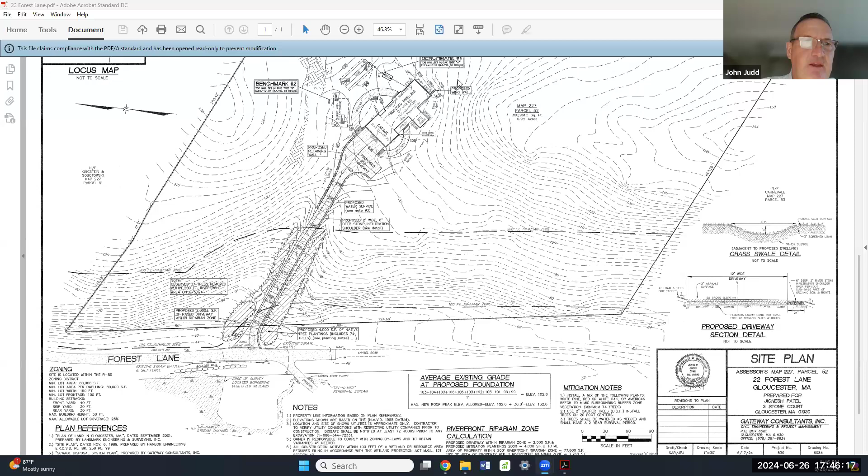I believe Jake Patel is on the line. If you don't recognize him, Chuck, he may want to speak to it. Thank you.

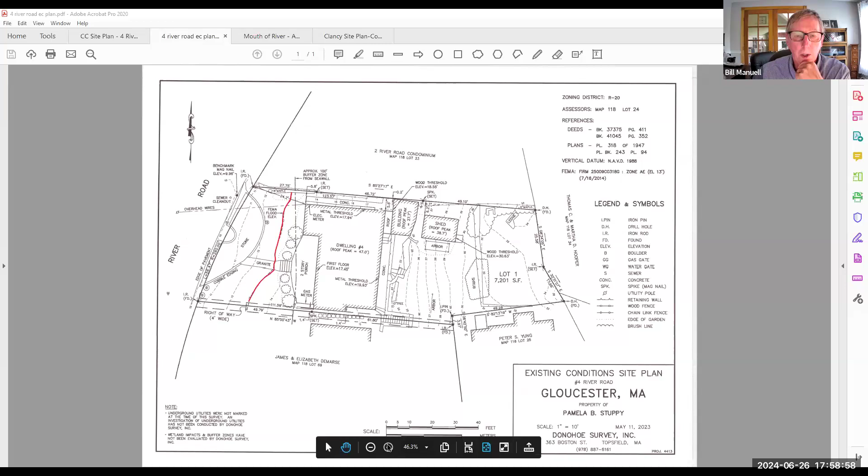I'll start out with this existing conditions plan, it's a little more clear to look at first. This is a piece of property at the very head of a cove adjacent to River Road. It's on the opposite side of the street from the coastal resource areas. There's a wharf wall and mud flats on the opposite side of the street, over here. The FEMA flood map says there's an AE zone extending to elevation 13, which has been survey located, and elevation 13 intersects the property right through here.

Now, we all know that under policy 92-1, if there's land steeper than a 10-to-1 slope below the 100-year flood elevation, that's considered a coastal bank. So this area on the property, already developed with a stone driveway, walkway, landscaping, and grass, is actually considered a coastal bank. And the red line would be the limit of land subject to coastal storm flowage. We have the existing home here, and there's a sort of shed building extension here, a shed out back, and some lawn and landscaping.

And you can see the topography here, it slopes up rather steeply behind the house. There's also walkways, a porch on the west side, and more paved walkways here. This is a pretty neat project.

Because, despite a tear down and rebuild, and actually an expansion of the footprint, we've maximized the footprint over the existing features, and we've removed a lot of impervious areas on the property. So at the end of the day, there's only a net increase of 129 square feet of impervious area, and we've mitigated for that by over a factor of 8.

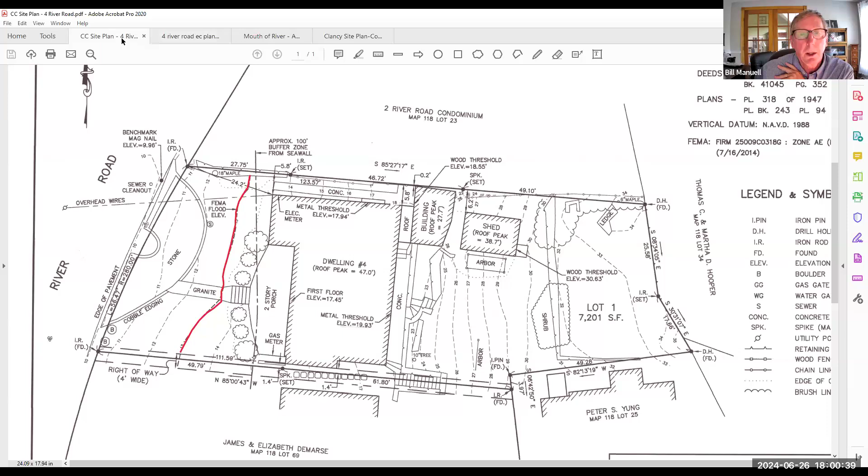So let me jump into the plan right now. The first thing I'd like to show you is this little detail at the bottom of the plan here. This is 4 River Road here. As I said, it's at the very upper reaches of a cove adjacent to the Annisquam River.

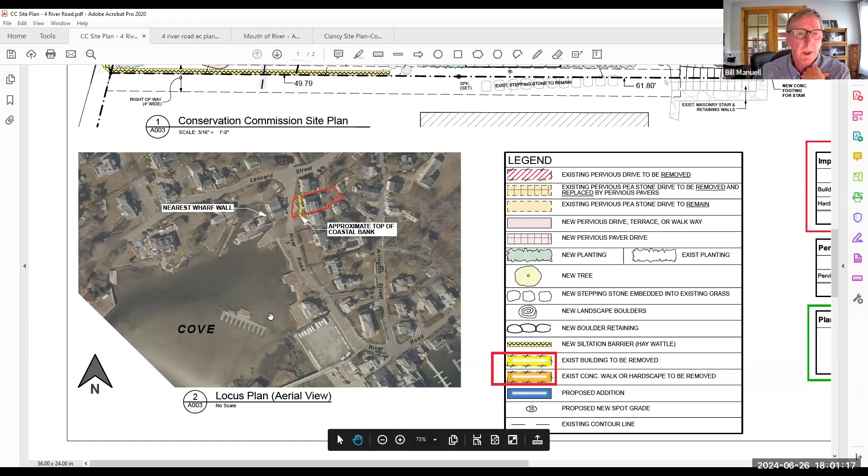There is about over 600 feet of separation between the front of the house and the actual channel of the river. We have Dr. Peter Rosen, who's going to speak later, and he's going to explain the geology of the cove and the characterization of this area. But I will get into the proposed work and let you know what's going on.

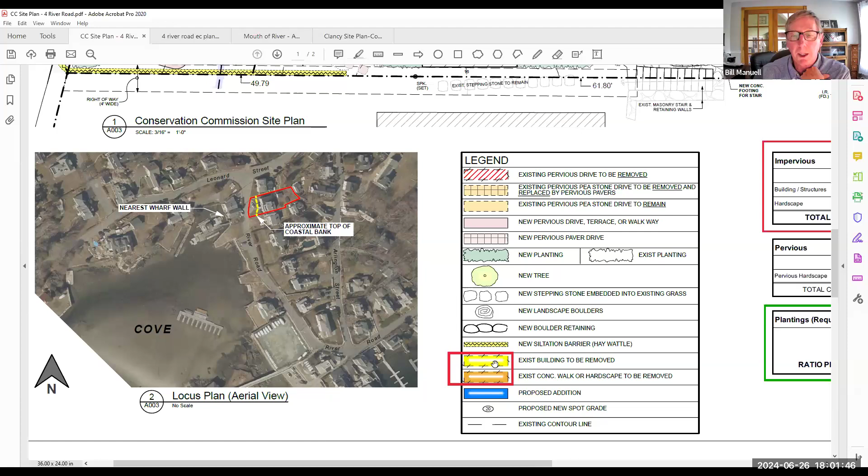So we tried to color code the plan. Poor & Company is the architect, and they do very well at trying to make things as clear as possible. The things we want you to key in on are blue color, which is proposed additions to the structure. Brown and yellow are existing building or existing walkways or impervious surfaces that will be removed. So the intent is to demolish the existing structure here, take it right down to the ground, and rebuild it in the same footprint.

Then add on this blue area back here. This will actually be, for lack of a better term, kind of a duplex structure intended for use by two family members. That's what the blue is here, the extension for the other unit. The yellow here, you could see, was positioned over the existing sheds and home extension, over paved walkways and such.

And so, as I said, we've also incorporated a lot of pervious softscape and hardscape. That's what all this pink color is, either terracing or patio surfaces that are all pervious. So we've maximized use of pervious cover and minimized impervious cover, both out front and out back. That's how we achieved a small net increase of only 129 square feet of impervious area.

So some of the work occurs on that coastal bank, which was already previously developed. The post-development use is entirely consistent with what is already there: driveway, landscaping, and lawn. I think it's reasonable to conclude that if we don't have any destabilizing activities or uses on the current front of the house, which is characterized as coastal bank, then there won't be any of those destabilizing features in the post-development conditions.

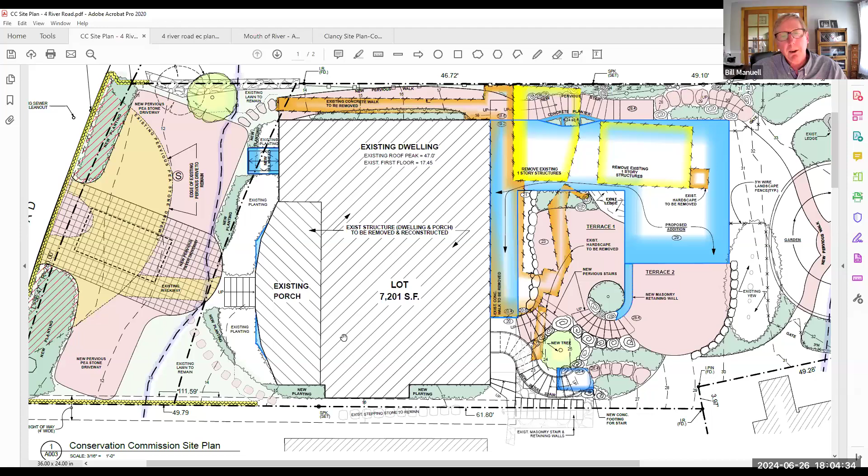So there's a very minimal increase of impervious area. It's basically like any other tear-down rebuild. It's on the opposite side of the road.

I should mention that we have appropriate erosion control that's going to be installed at the edge of the property. Obviously, where we need to get into the property, there will be a mulch sock, and we will remove that during the day and replace it at night. So in the event of any rain events at night or on weekends, the area is protected and it would prevent any sedimentation from going off-site and potentially across the road. It would have to cross the road, about 25 feet of pavement.

Then there's a width of grass on the opposite side of the road that's probably, I'd say, 30 feet wide. If it isn't a house directly across the road, it's a width of grass, so it would be pretty unlikely that anything could reach the adjacent wharf walls.

So I would like to acknowledge, I mentioned first, that we do have that DEP file number 28-3005 that dropped, I think yesterday or late Monday. And there are no comments from DEP on that. That's always a good sign.

I would also like to acknowledge the email we got from the Conservation Office that suggested maybe there's riverfront here. We did look at that, whether this could be considered riverfront, right at the very beginning of the project. And we enlisted the help of Dr. Peter Rosen. He is a coastal geologist, a PhD, and I believe he was a professor at Northeastern University, recently retired. He is going to explain the geology and morphology of the cove and its proximity to the river, and the fact that we're not in riverfront.

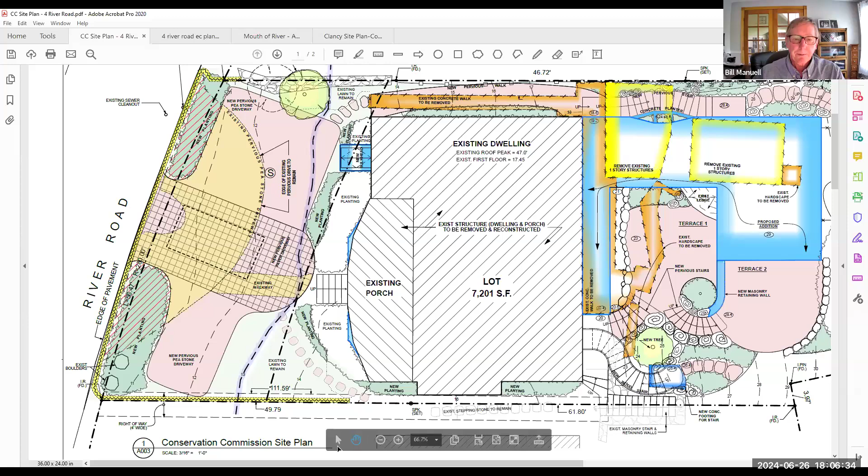So I'm going to stop sharing my screen and let Dr. Rosen speak to you.

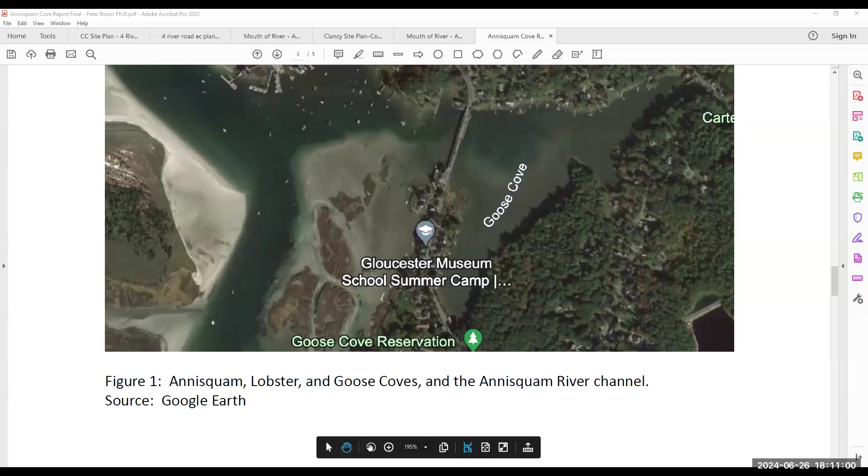Okay, well I will begin. This is off the Annisquam River, as you know. The Annisquam River is a somewhat unusual river in that it has no freshwater input. It has saltwater input, ocean input from both ends, both from Annisquam Bay and through the Blynman Canal. So the tides go in both ends and the saltwater tides go out both ends. But it is considered a river, and a very unusual river. I realize it is not unique, because when I thought about it, there are many rivers like this controlled by bedrock with ocean connections in Maine.

It's very common in Casco Bay and elsewhere. So it is not unique, but it is unusual, and probably the only river of this sort, bedrock controlled, with saltwater input at both ends of what's considered to be the river. With that, we're interested in the northern end, which is what we're looking at here in this diagram. The northern end of the Annisquam River, on the left-hand side of the diagram, adjacent to light-colored Wingaersheek Beach, has a series of coves.

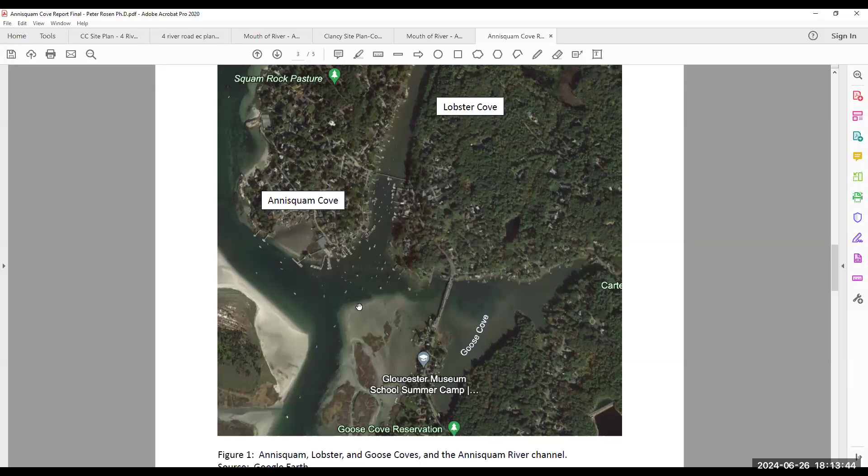It is directly adjacent to the main channel of the Annisquam River.

As we move down, here's a photograph of the cove. This cove has some very distinctive characteristics. What we can see is that the cove is largely filled with tidal flats, mud flats, or sandy mud.

The project is in the upper right of the diagram, off near the word Lobster, actually on the opposite side of the street. The area encompassing River Road, on the upper right, and all the land to the left of it is wharfage, probably centuries old. It's all flat, it's all fill.

The entire shoreline is vertical stone seawall, up to the mud flats. What's interesting about the mud flats, which is most of what you're looking at in the picture, is that it is virtually featureless, which raises questions about how much water is flowing.

The only feature is in the upper portion of the cove. There is a broad swale, slightly darker colored, where the lower tide seems to accumulate and drain into the main river. This swale is unusual because typically on mudflats, once you have flowing water, you generally get channel formation. Here there's almost no channel formation.

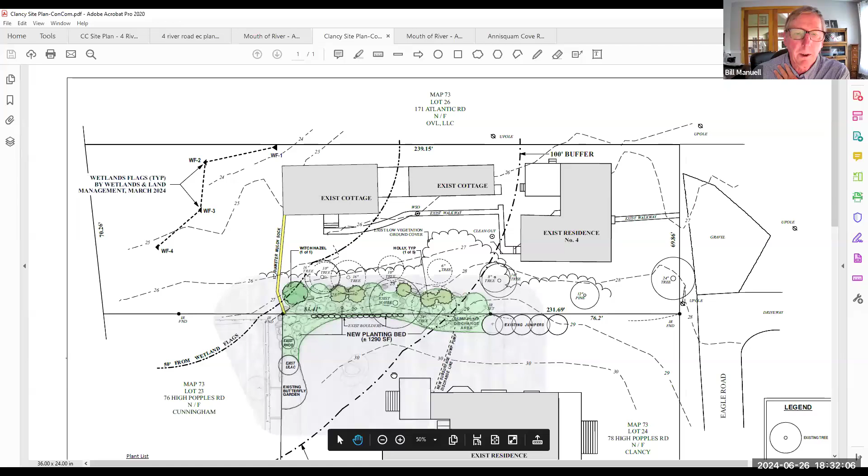Right now it's just sort of a mishmash between the properties, and Kathy is looking to create more of a formalized, let's call it a living fence, if you will. So we've commissioned Kate Wiggin to come up with a planting plan.

Right now this area is comprised mostly of ground cover that is escaped ornamental ivy. The shrubbery is mostly honeysuckle or small growth Norway maple. The overstory, I believe, is 100% Norway maple. A lot of it appears to be self-propagated, just dropping samaras and sprouting.

You can see that over the years there are trees that are very close to each other. Some have broken limbs, some are codominant trunks, some are growing right next to each other, and they have misshapen crowns. They have no branches on one side, and the branches on the other side are all loaded, adding weight to the other side of the tree.

Simple enough project, create this living fence here. We're going to remove 5 of these Norway maple trees. They are the dashed lines, the ones that'll be removed. And then we're going to add in 6 additional trees, so you're getting better than 1-to-1 tree replacement.

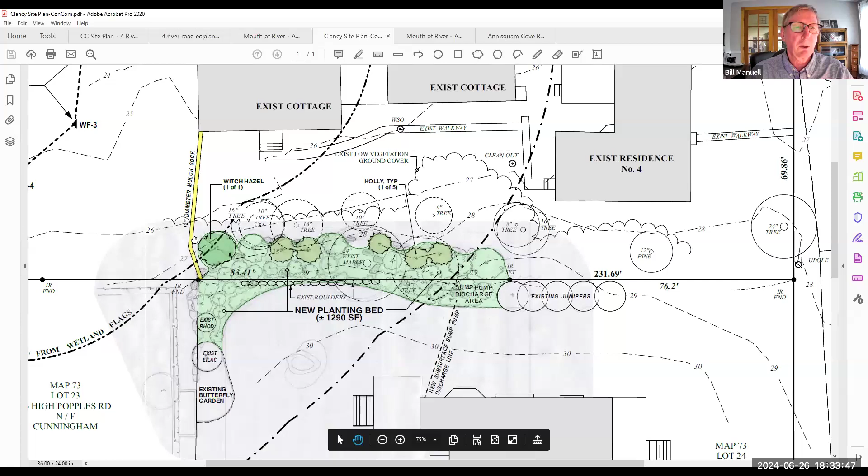There'll be a mix of perennials and perennial plants plus shrubs and stuff, and there's a whole plant list over here. These are all native species as far as I can tell. It occurs in the buffer zone. That's why we have put a 12-inch diameter mulch sock here to define the work zone.

And this should be a fairly simple landscape project. There is a new sump pump discharge we would like to install in this location here. Presently, the owner throws out a corrugated black plastic pipe across the lawn, and it sits there basically all spring and summer. It's unsightly and you have to move it every time you mow the grass. So this will become a subsurface perforated pipe to a discharge, like a stone sump area within the new landscape. So appropriate erosion control, native plants, replacing trees that were taken down.

All the trees are non-natives anyway, so again, fairly simple project. I think we would have been able to close it had we had a file number tonight.

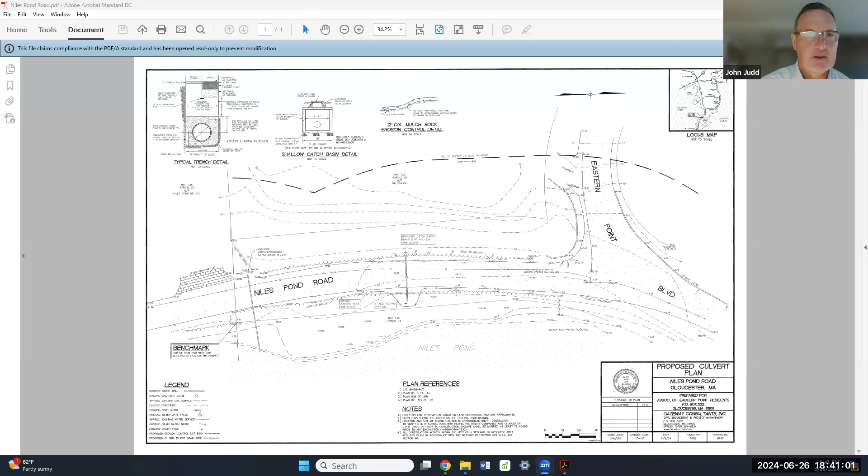We do have proposed temporary erosion control sock along the lower end. We're not proposing much, if any, vegetation removal. You can see there is a brush line located—that's the squiggly line—and that would basically just allow that pipe to daylight to the elevation. It's a very shallow pipe, and you can see the actual catch basin structure is only 36 inches in diameter, and very shallow. So I can answer any questions you might have at this time.

Okay, sir. I'll open up public comment first. Anyone in the public who wishes to speak for or against the project at Niles Pond Road may do so by hitting your raise your hand button at the bottom of your screen or hitting star nine on your phone or handheld device. We currently have 7 attendees and there are no hands up at this time. Seeing none, hearing none, I close the public comment period.

Next up would be commissioner roll call comments. Member Charpentier: no comment. No comments. Gradwell: no comment. Member Sargent: Yeah, I'm wondering if the existing drain and catch basin is proposed to be removed. And if not, why not have a drainage swale connect the existing system and snake the clogged drain pipe? And if not, and you're going to be installing it at that low point and water does connect there, how is work on the pond side of the road going to be conducted within the wetland itself? Thank you.

Yeah, I'm wondering where the discharge from the pipe will go. Will that be infiltrated into the ground, or will that be on the surface? Will that reach Niles Pond? And will that discharge impact the water quality of Niles Pond? And if so, are there any options for treatment that are available? Nothing further from me.

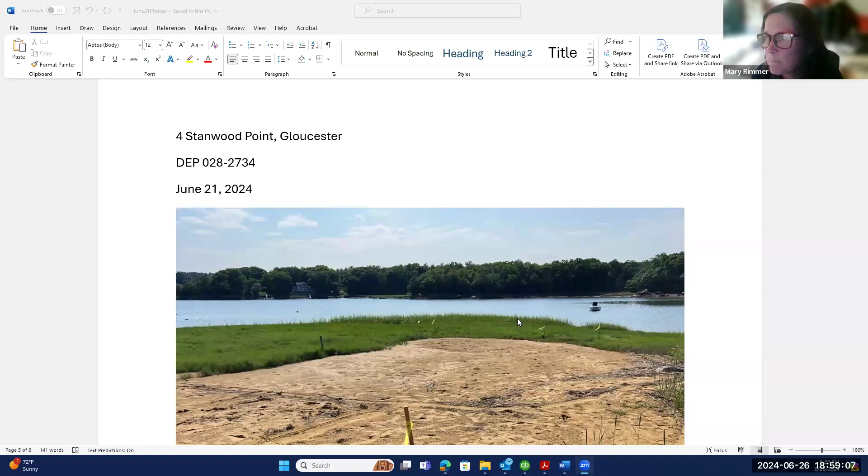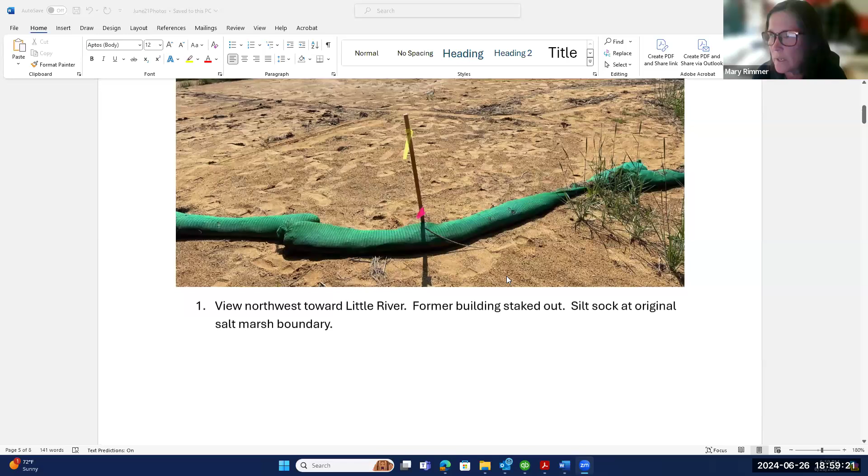These are some photos taken at the site on Friday. We had the original building staked out. You can see on the riverside—this was the river-facing side—there was a little deck off the back there. We'll scroll down to show some other photos. You can see from this view, this is the river-facing side of the building.

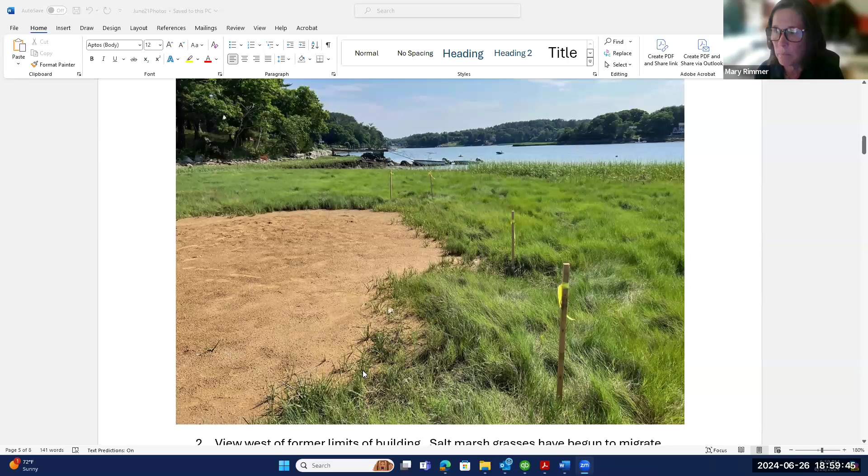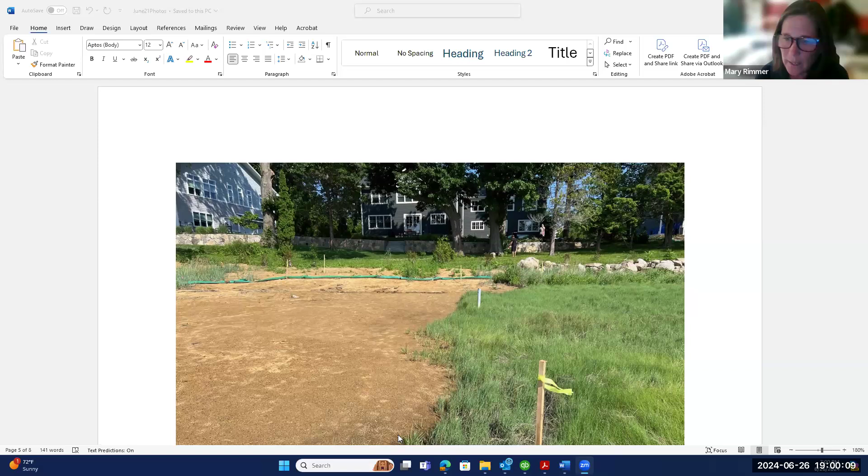Since the building was taken down, we've had migration of salt marsh vegetation into the site, which is encouraging, and that is continuing to occur. You can see it's partially within the sand area we had previously installed. If you remember, the location was kind of a bowl, deeper in the middle, so it's logical that the vegetation would begin to encroach on the margins. There's been a substantial increase in vegetation here, which is encouraging. The surveyors also located this edge of vegetation so we can recalculate how much new vegetation needs to occur.

There are some additional photos here. This silt sock back here is actually at the limit of the salt marsh as it was originally flagged. You can see there's a little bit of remnant—there's a flag right here, and it came along that if we extend the salt marsh, we come along here and go right in front of this rock.

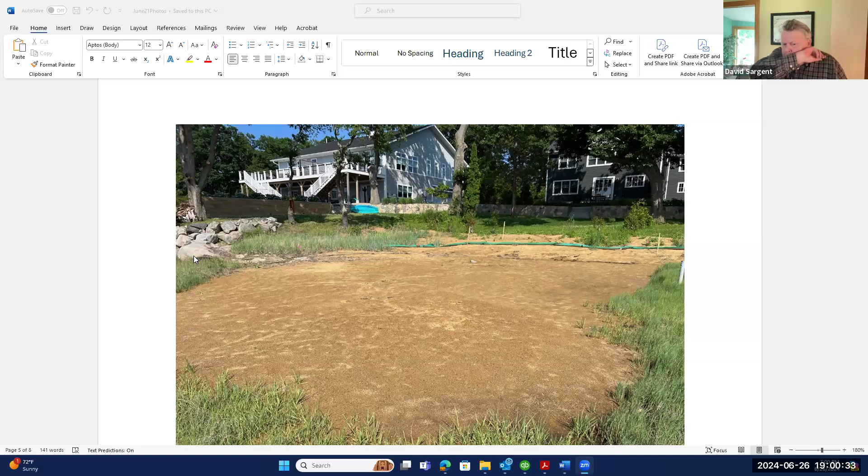This is just a view of the undisturbed marsh. There was a connector building that extended from one on lot 3A across to the one on lot 2A. Since that's been taken down as well, the high marsh has come right up and just even beyond a little bit the original building location.

All encouraging. We did some soil testing just to see what the depth of the material was. I'll provide a more detailed report, but I thought it was interesting to see this is the material that was put down. There's in places up to 9 inches in the middle, deeper part. This was the most recent material that was put down.

It looks like this coarse sand here, which already turned black from organics, was probably what the original layer looked like. Then there's lighter sand below that. You can see where we're starting to get into natural material.

The site is interesting because the history of the property means there were past activities, including the construction of a beach when it was a camp. So there was regularly sand deposited near the area, and there's also sand that overwashes during flood events.

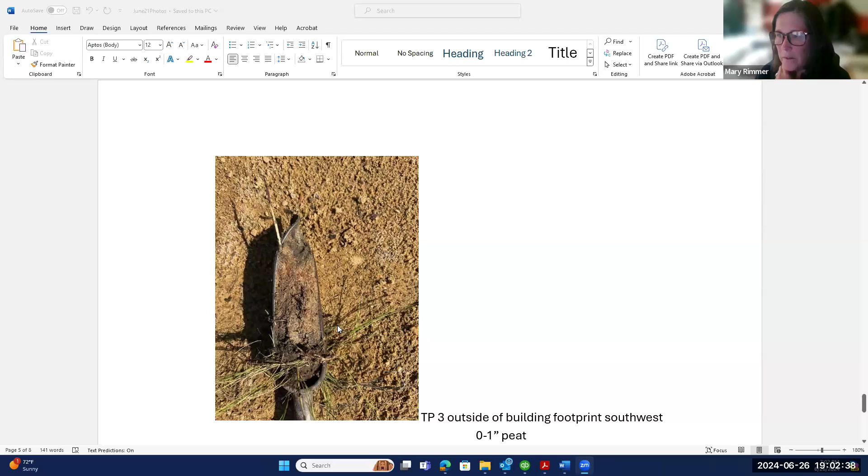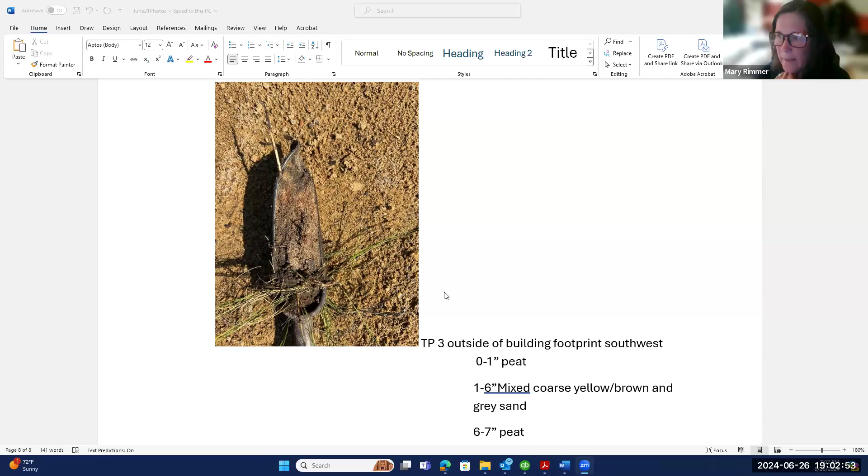That was on the downstream side. This is on the upstream side. Again, we have vegetation and a kind of peat layer, and then we have sand underneath that, and then more peat layers. A couple of these, you can see there's layers, and this is down 14, 16 inches in the native marsh right there. So there's a history of layering of sand, and that's why we're proposing that particular substrate.

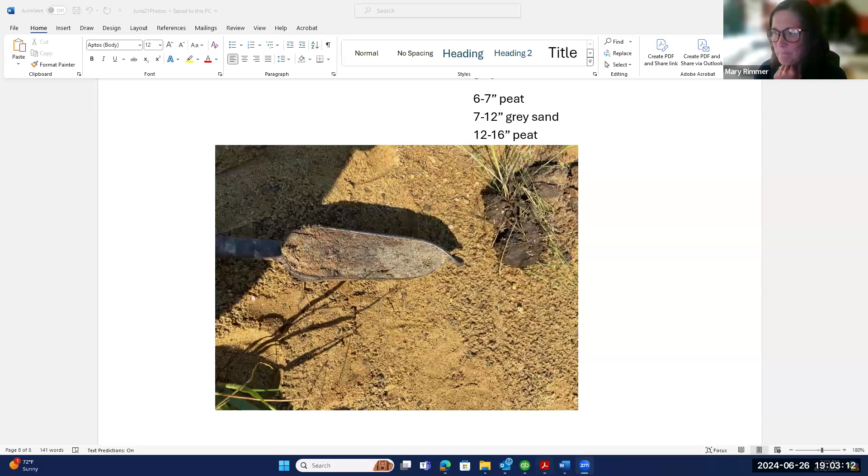Once the buildings were removed and you could really get access to it, Mr. Pellich removed old sewer pipes and bituminous material that was used to backfill. There's a lot of really poor quality material that was put in there. Since then, he's made significant improvements, and the intention is to continue to do that.

So I'm going to stop sharing now.

Just one other point that I think might be relevant to this enforcement order, but certainly for the next item for lot 4 on your agenda: I mentioned to Chuck today that there's some legislation pending right now in the State House, part of an omnibus economic stimulus bill from the governor that contains a whole lot of different aspects. One of them is to add a new tolling period, not unrelated to COVID, but starting January 1st, 2023, any projects that have a valid permit as of that date would get an automatic 2-year extension.